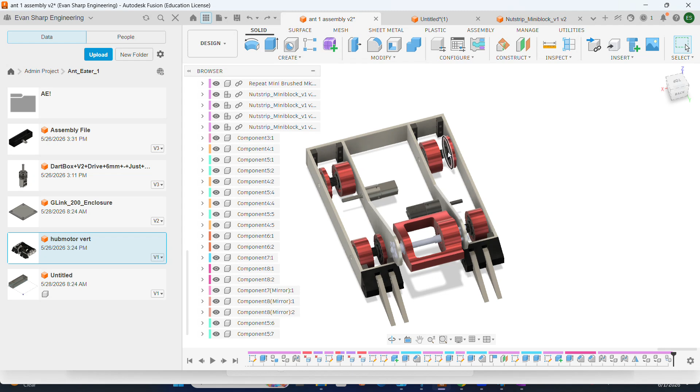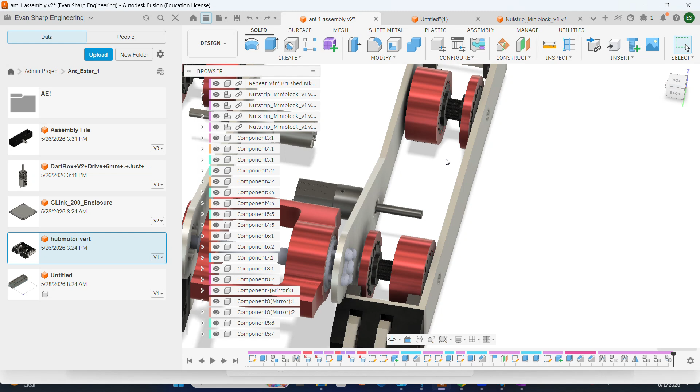Everybody, it's Evan back, and today I'm going to be making another addition to the Antweight BattleBot Engineer with Me playlist. So if you left off last episode, you'd remember that we just finished creating this two-part subassembly for the tires. So just to take a quick review of those, this is going to be a two-component subassembly. The first one is this inner sort of hub that has a pulley adapter. I'm going to print this from PLA, and this outside tire is going to be cast from silicone. So later on I'll have to make those molds, but that'll probably be another video. For now, I want to finish the drive system.

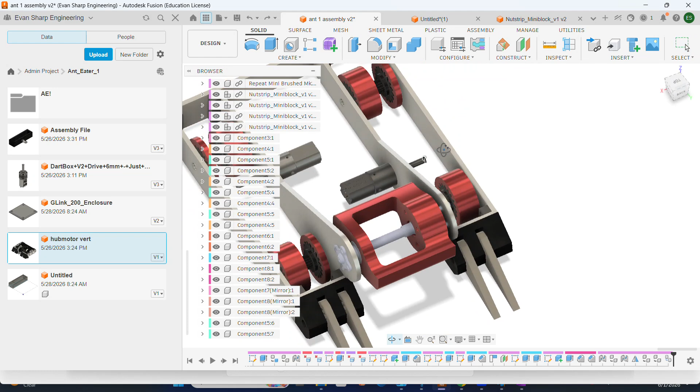So the last component that I really need to make is going to be the central adapter that transfers the torque from this shaft to these two pulleys. So it's going to have to be a kind of a two pulley or two groove component that attaches to the shaft with a little bit of interference fit. And then I'm also going to find a way to allow it to rotate but be fixed to this outside frame, just so that the tension from those belts isn't putting any unwanted shear force onto this shaft. So yeah, let's go ahead and get started.

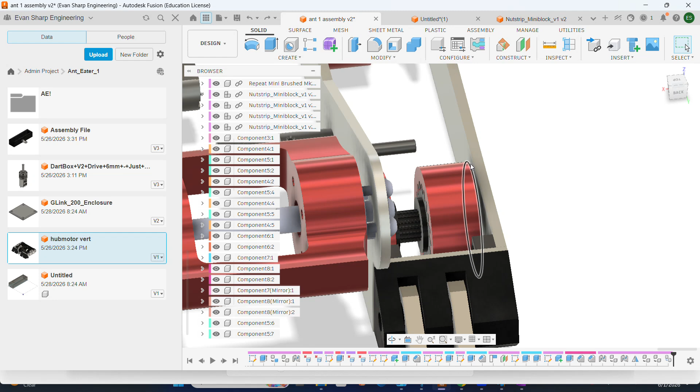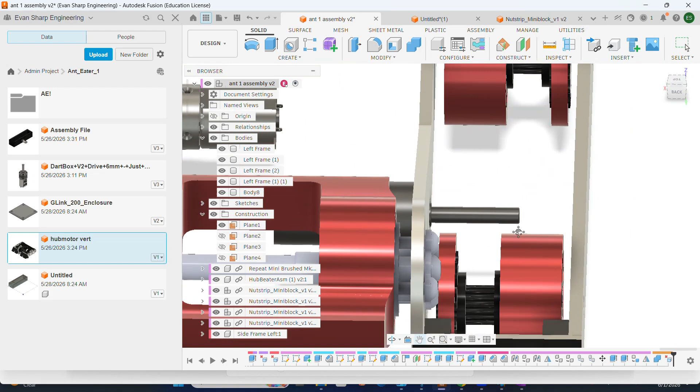I think what I'm going to do is, rather than making a whole new component, I'm going to copy over one of these hubs and then just sort of slice this part out because it already has that pattern that we need, and then mirror it across this face and then work from there. So I'm going to go ahead and get started on that. Okay, so you can see I have that component kind of coming along. So what I'm going to do is I'm going to joint it to this shaft, just so we get the positioning right. I'm going to make sure that these pulleys look aligned, and then I'm going to create this D-shaped hole through this part.

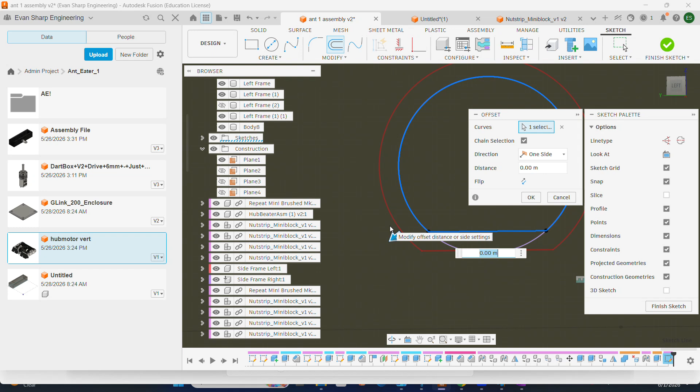So I'm kind of just thinking through how I want this to fit. Especially when using 3D printed materials, it's really hard to predict how these things are going to fit. It could change just based off the material you're using, how much infill you have, wall thickness, etc. Because what happens is when you have those 3D prints, that hot plastic expands, right? It gets printed out into the desired shape, and then it actually shrinks as it cools down. So what I want to do is make this a little bit bigger than I think it needs to be. I said I want to have an interference fit. I'm going to offset this and make it probably about 0.5 millimeter.

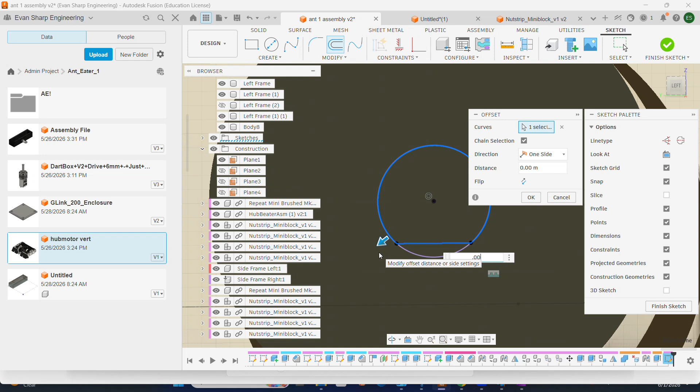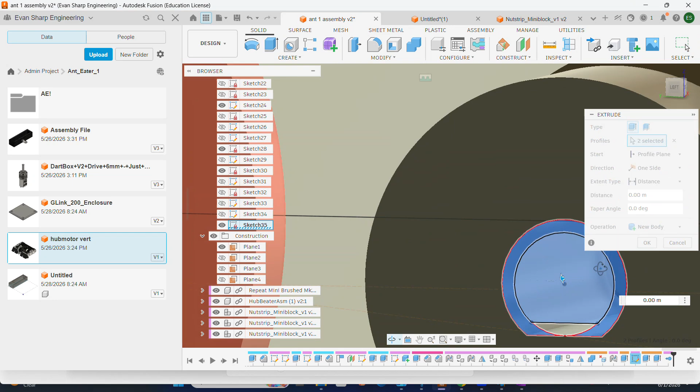It's really hard to say, but the cool thing about FDM 3D printing is that it's pretty quick, especially with a component this small. I can afford to come back and do this again if the component doesn't fit well. So I'm going to go ahead and do that. And then I actually made a mistake. I think it's going to be really important to not have this hole all the way through. That way those pulleys are properly aligned. So we need to have a stopping face. So I'm going to extrude this. I'm going to have to make this thing transparent real quick, but I'm going to have to extrude it straight to the shaft. I'm going to turn this back on. Should be join. There we go.

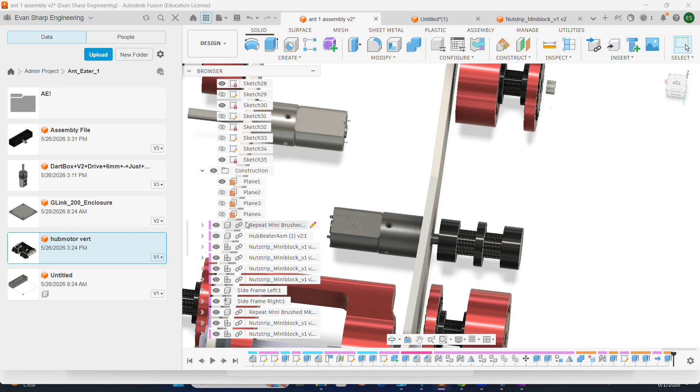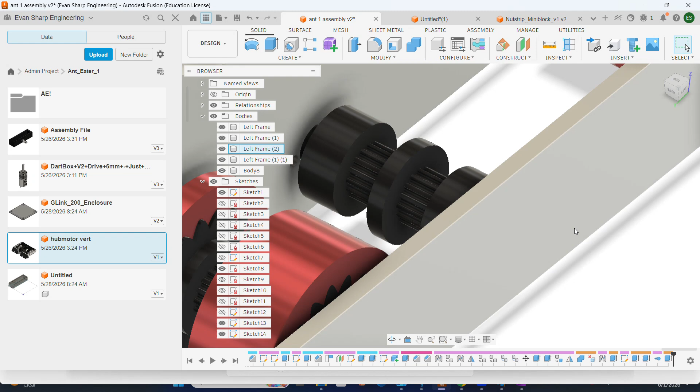Alright, so the next thing I'm going to do is mount this rotating component to this frame, which I actually disabled the visibility on. Should probably go ahead and make this component, but I'll wait a little longer. So the way I'm going to do that is I'm going to put a cutout through this in the shape of a square so that it can't turn, and that cutout will house a bearing, and then this will have a little part sticking out that will go into the bore of that bearing. So the first thing I want to do is find a properly sized bearing, probably on Amazon. So the entire thing is 8 millimeters. The bigger it is, the less likely it is going to be to fracture, right? I'm going to try to find something with a 5 millimeter bore.

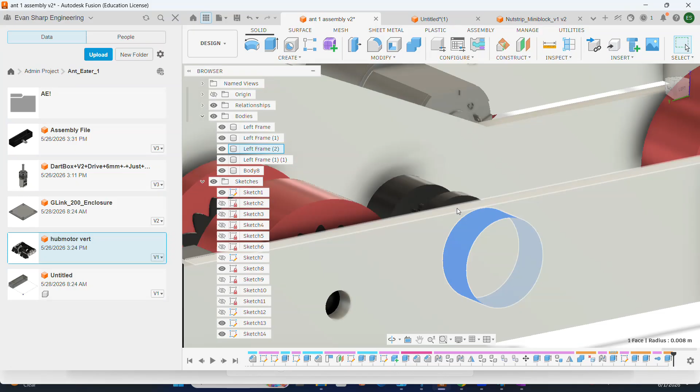Alright, so I think I'm going to go with these. Most of the options that I saw had a 16 millimeter outer diameter. I think that's a little bit excessive for what we need, so we're going to stick with this, because it's only 1 centimeter outer diameter. So I'm going to add this to our BOM. Go ahead and put together some CAD of that square component that's going to notch into this aluminum, and hopefully you guys will see what I'm talking about as it comes together.

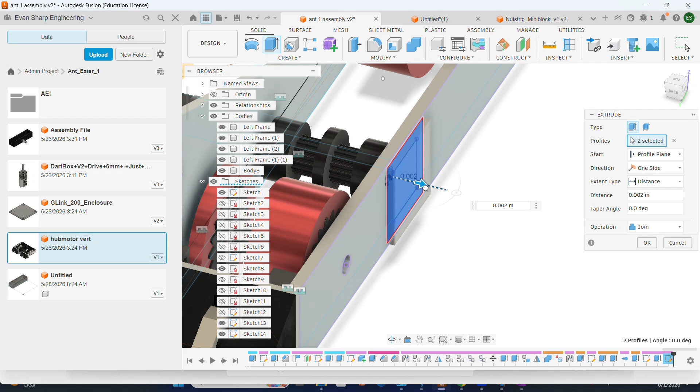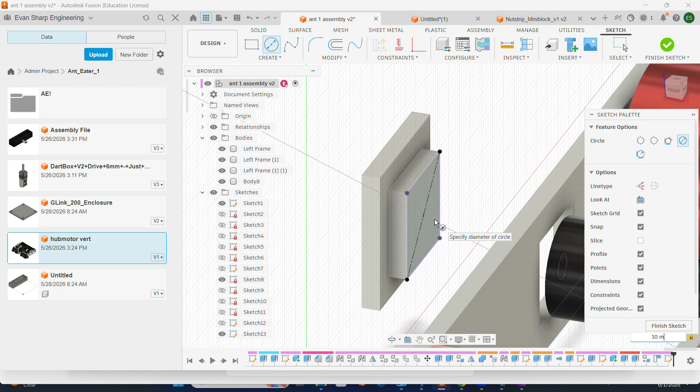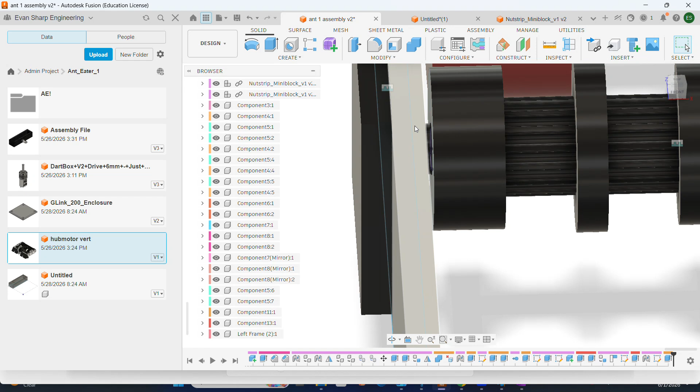So I'm going to go ahead and make this circle where this bearing is going to sit, and it's going to be a press fit, so it'll be in there pretty snug. Sorry, 10 millimeters for the outer diameter. And because I am a little worried about this nub, especially if it's being FDM printed, I'm going to add a little bit of a fillet to the edge of this shaft right here. We'll do 1 millimeter, as I think 2 millimeters would interfere with that bearing.

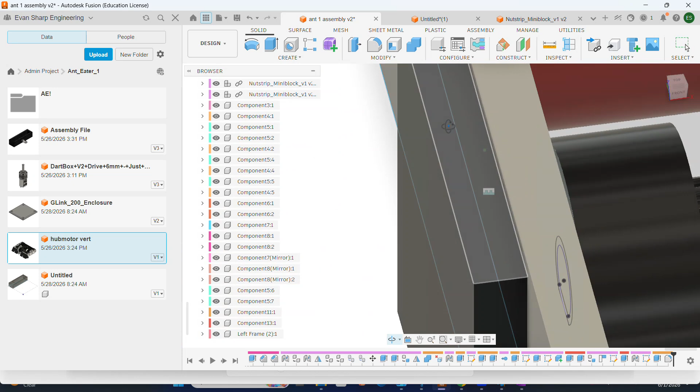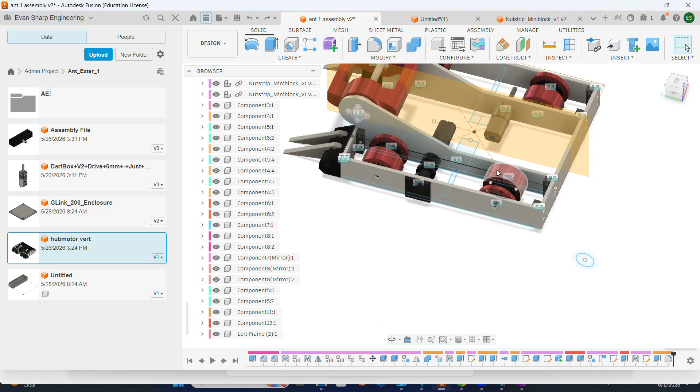Alright, so this is what we have so far. And in order to secure this, I'm just going to epoxy that edge onto this aluminum right here, rather than adding any more fasteners. So yeah, and then we just mirror that to the other side, and the drive system is pretty much done. Alright, yeah, and there you go.

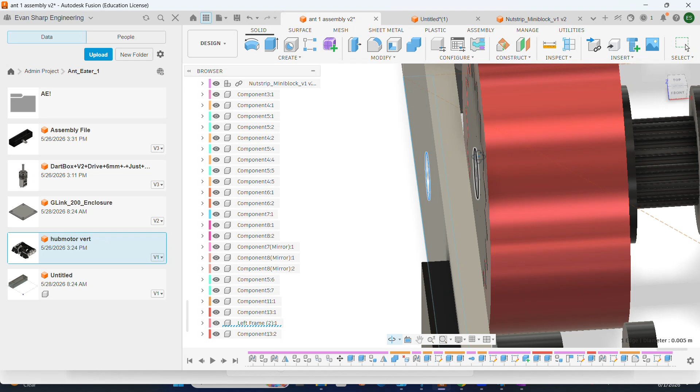And then for these wheels, to attach them, I'm just going to add some sort of long M5. I'm not exactly sure the length, but it's just going to go through here, all the way through these wheels. I might do an M4 so there's more clearance, but those wheels will be allowed to rotate around that bolt, which will serve as an axle. So I'm not going to show that in this video. I think it's pretty self-explanatory, but that's how I am going to go about that. So yeah, that's pretty much it.